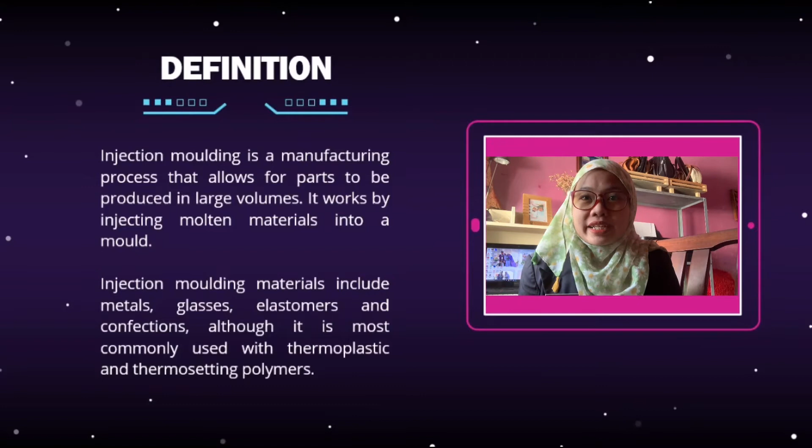Injection molding is a manufacturing process that allows some parts to be produced in large volumes. It works by injecting molten materials into a mold. Most molds are made from metal, usually aluminium or steel, and precision machined to match the features of the product.

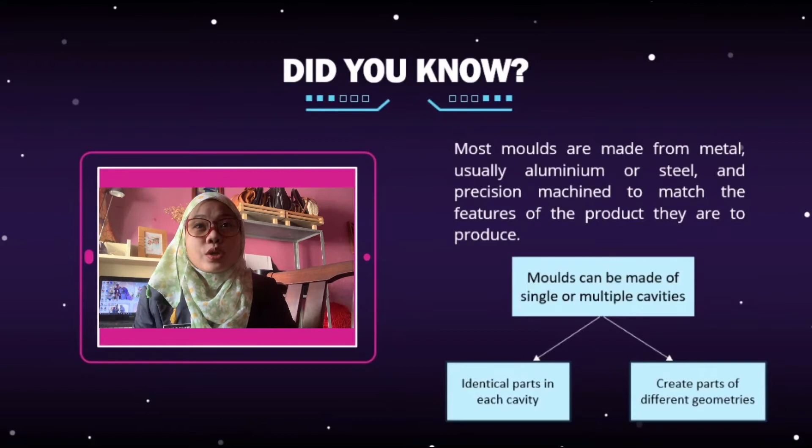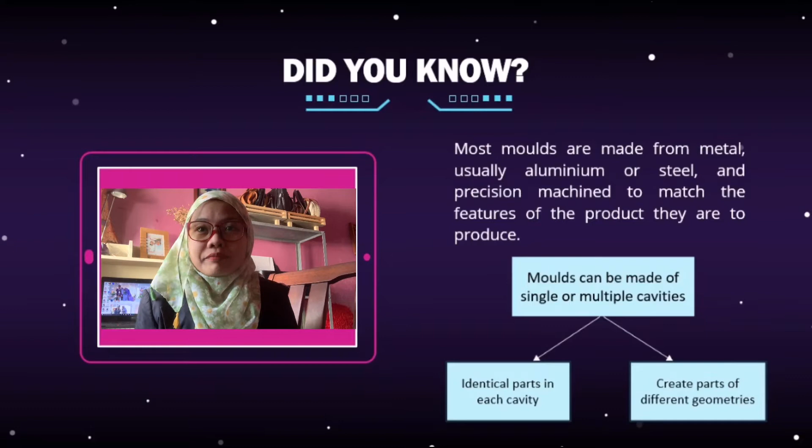Did you know molds can be made of single or multiple cavities? Multiple cavity molds can have identical parts in each cavity or can be unique to create parts of different geometries. Furthermore, the injection molding process requires careful design, including the shape and features of the part, the materials for the part and the molds, and the properties of the molding machine.

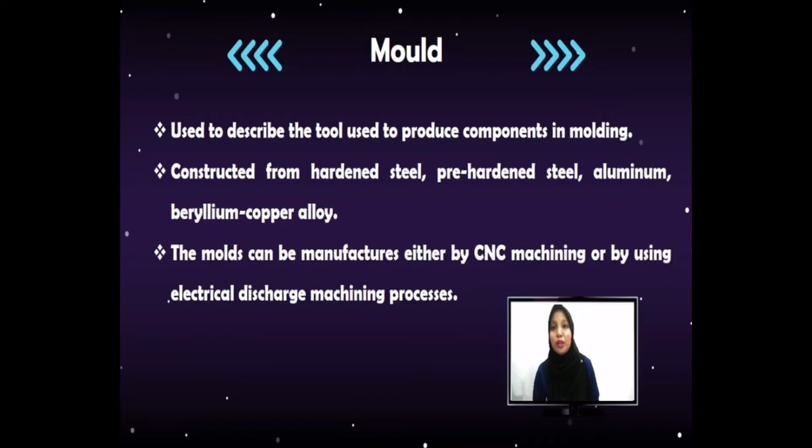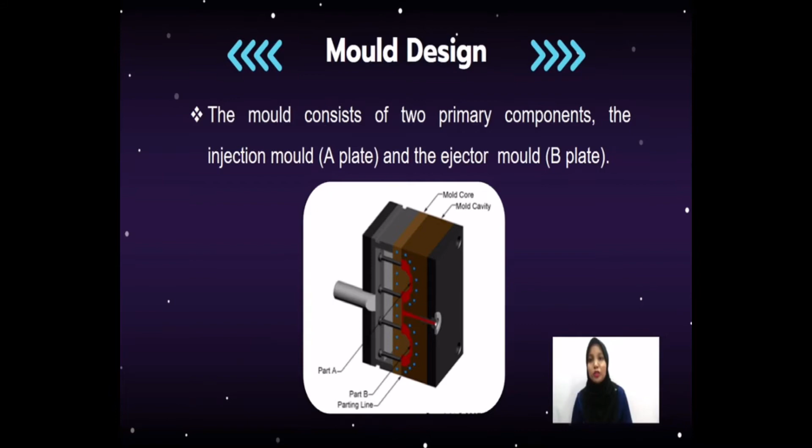Next, mold design considerations. Firstly, shrinkage allowance depends on the shrinkage property of the material, core and cavity size. Second, cooling circuit: in order to reduce the cycle time, water circulates through holes drilled in both the core and cavity plates.

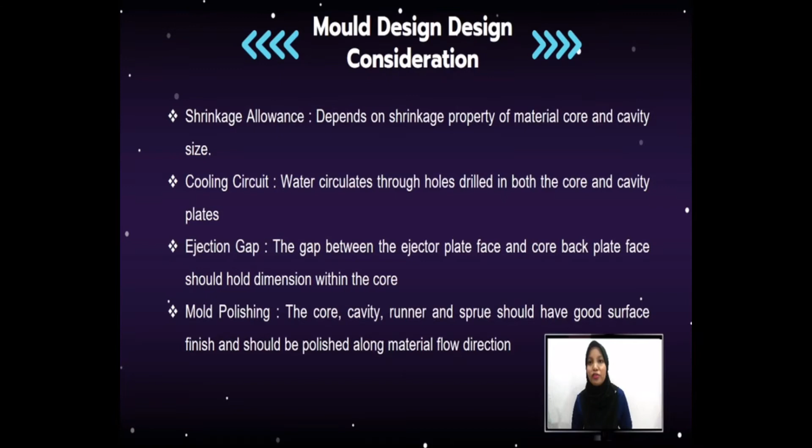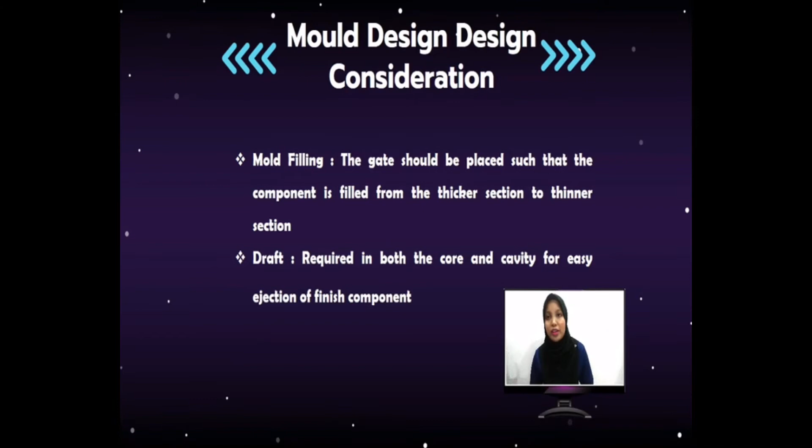Third, ejection gaps. The gap between the ejector plate face and core back plate face should hold dimension within the core, and it must allow the component to be fully removed from the mold. Next, mold polishing: the core, cavity, runner and sprue should have good surface finish and be polished along the material flow direction. Filling: the gate should be placed such that the component is filled from thicker to thinner sections. And lastly, draft, required in both the core and cavity for easy ejection of the finished component.

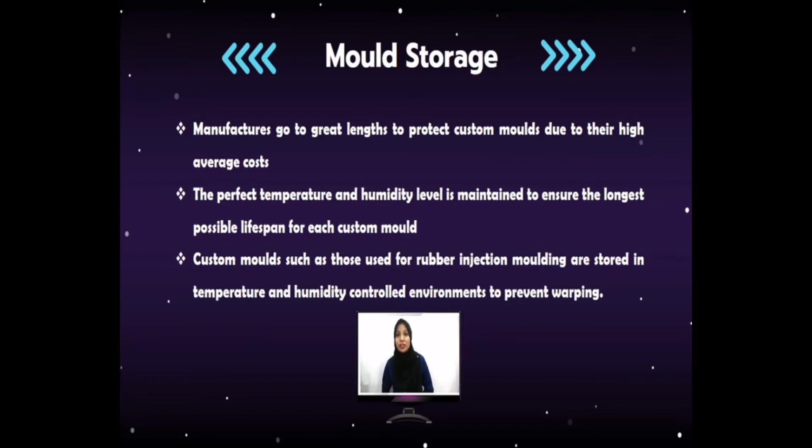Mold storage: manufacturers go to great lengths to protect custom molds due to their high average cost. Second, the perfect temperature and humidity level is maintained to ensure the longest possible lifespan for each custom mold. Third, custom molds such as those used for rubber injection molding are stored in a temperature and humidity controlled environment to prevent warping. Next, mold defects include blister, flash, burn marks, warping, weld lines, color streaks, and voids.

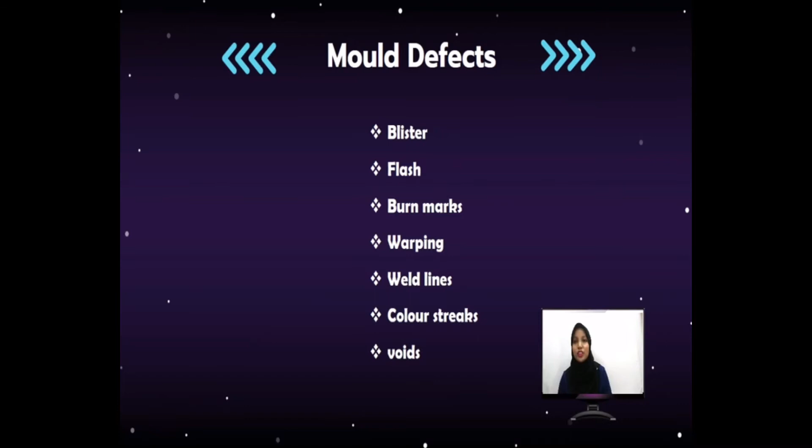Manpower: the functions of manpower are, first, to set up the process, second, to monitor the process and troubleshoot, and lastly, to operate the machine.

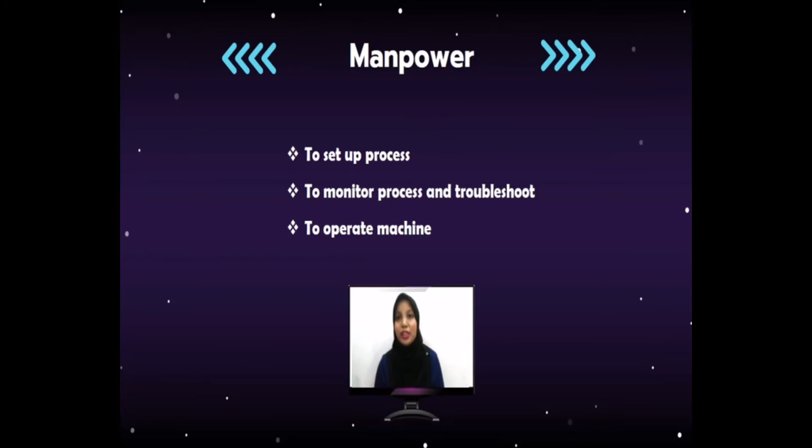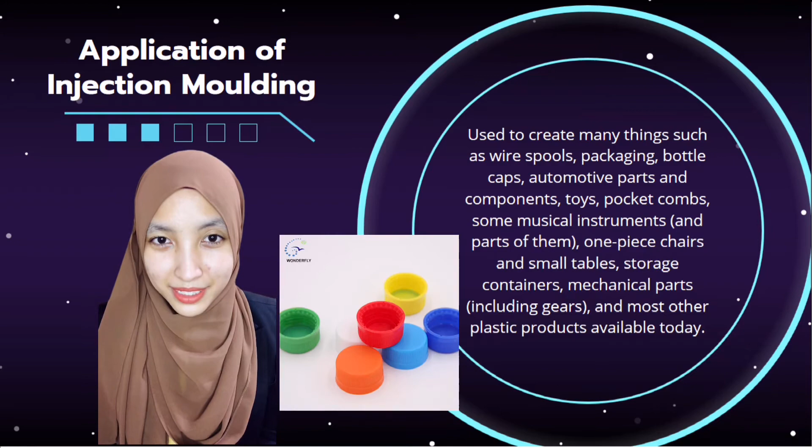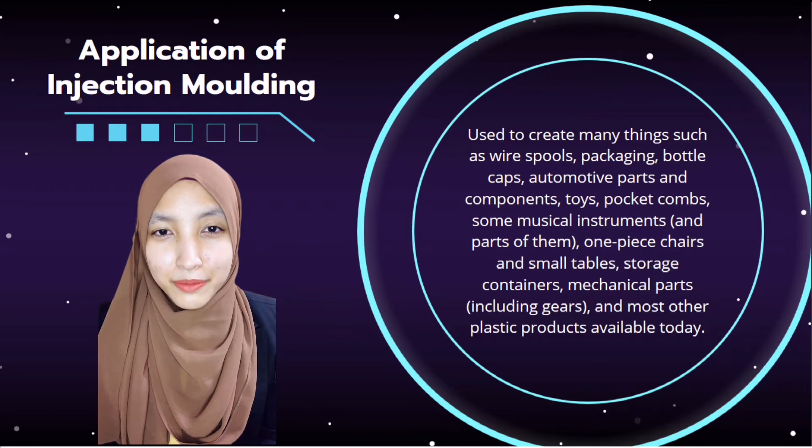Hi, today I will talk about applications of injection molding. It is used to create many things such as wire spools, packaging, bottle caps, automotive parts and components, toys, pocket combs, some musical instruments, one-piece chairs and small tables, storage containers, mechanical parts including gears, and most other plastic products available today.

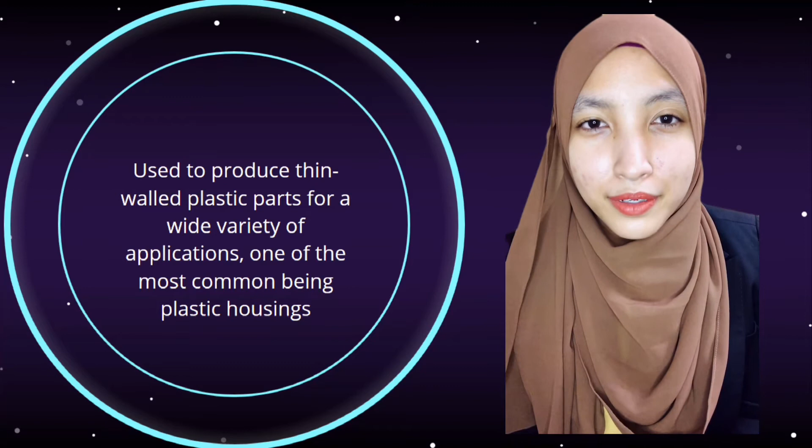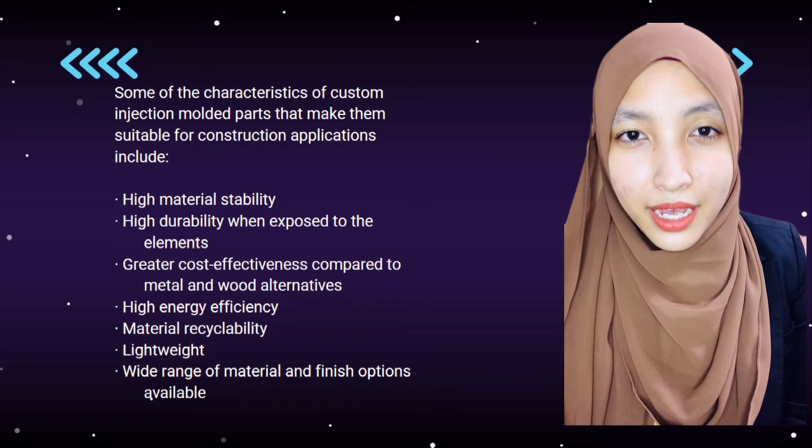It is also used to produce thin-wall plastic parts for a wide variety of applications, one of the most common being plastic housing. Some of the characteristics of custom injection molded parts that make them suitable for construction applications include: first, high material stability; second, high durability when exposed to the elements; third, greater cost effectiveness compared to metal and wood alternatives; fourth, high energy efficiency; fifth, material recyclability; sixth, lightweight; and seventh, a wide range of materials and finish options available.

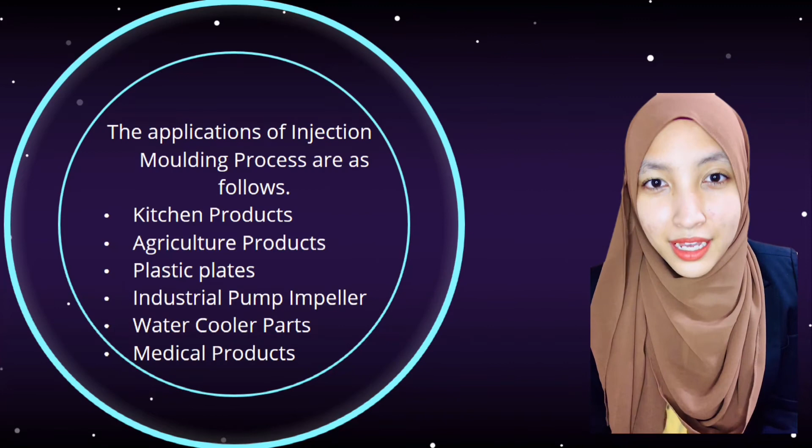The applications of the injection molding process are as follows: the first one is kitchen products, agriculture products, plastic plates, industrial pump impellers, water cooler parts, and medical products.

I'm Nora Sobeterosli and I will continue with the advantages of the injection molding process. So let's move to the first advantage: the first advantage is lower unit cost.

Injection molding often has a low production cost per unit due to reduced cycle times and a higher level of automation. Labor costs are typically relatively low in plastic injection molding compared with other types of molding. The ability to produce parts at a very high level with high output rates makes it cost efficient and effective. The molding equipment typically runs with a self-gating automatic tool to keep operation streamlined and production ongoing, requiring minimal supervision.

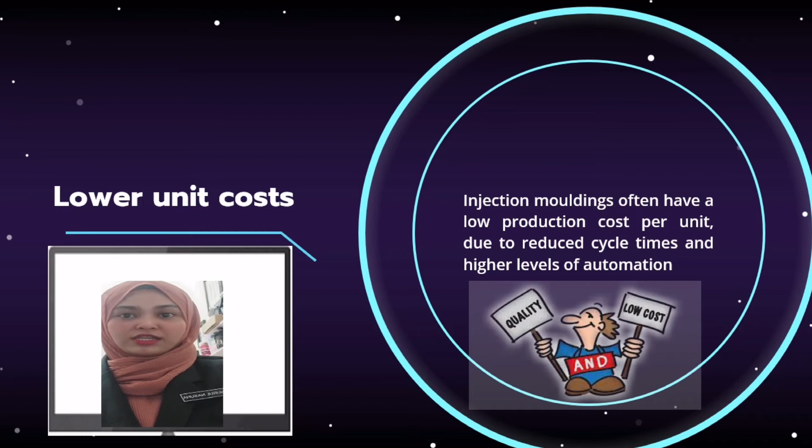The second advantage is little scrap and waste. If thermoplastic material is used in this process, excess material or scrap can be ground up and recycled so that it can be reused rather than wasted. This is not always the case with thermoset materials.

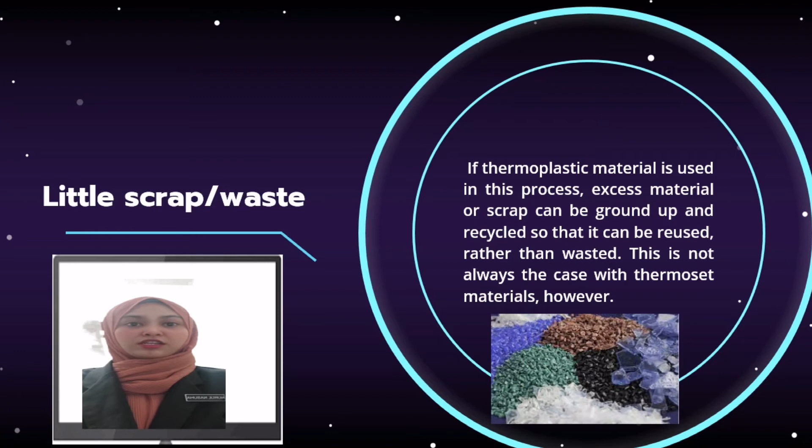However, when looking for a high-volume injection molding partner, it is important to consider a company's green manufacturing initiatives, as they signify a commitment to quality, sustainability, and optimal safety. During the molding process, excess plastic is generated, and this excess plastic can be reused again in the next product.

The third advantage of injection molding is faster cycle times. With injection molding, cycle times are approximately between 15 to 30 seconds for each cycle. This type of molding can produce a vast amount of parts per hour, depending on how many impressions are in your tools.

There are several good reasons that plastic injection molding is known as the most common and most efficient form of molding. The process itself is extremely fast compared to other methods, and the high production output rate makes it even more efficient and cost-effective.

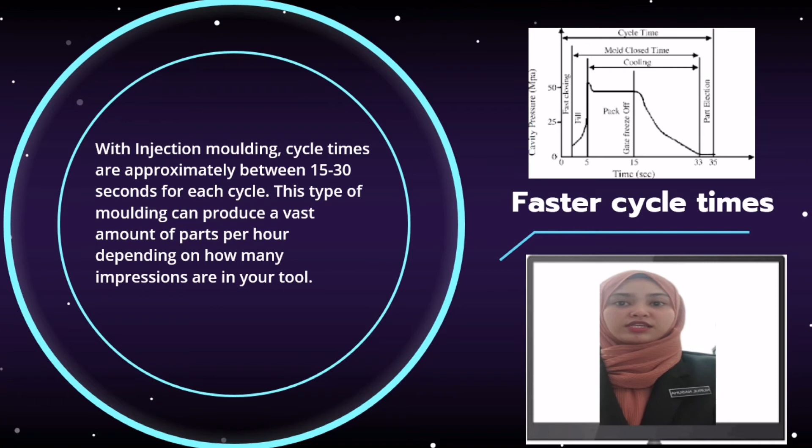Speed depends on the complexity and size of the mold, but only about 15 to 100 seconds pass between each cycle. With this short period between cycles, a greater quantity of molds can be produced in limited time, thus increasing possible revenue and profit margin.

The next advantage of injection molding is design flexibility. When you are able to design a part considering the design restrictions, you can integrate other parts of an assembly into a single plastic injection to reduce the cost and production time for this part.

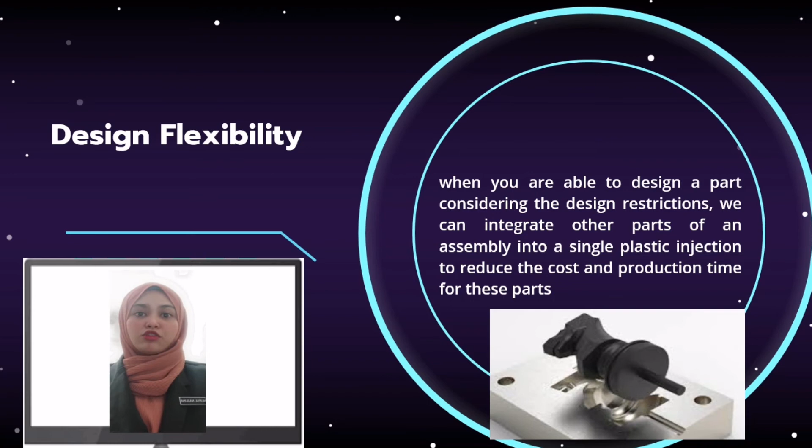Regardless of the complexity of your product, you will have complete control and flexibility when it comes to the design of your product. Additionally, injection molding allows for a range of different types of plastic and colors to be used to create your item, meaning you can customize it to obtain your desired result.

The last advantage of injection molding is consistency. In comparison to other production techniques, injection molding is second to none for its consistency. Every part produced is replicated on every turn, which is a huge advantage when it comes to mass production and ensuring quality control.

It also doesn't matter how simple or complex your design is either; if your tooling is built quality and correctly, your parts will be quality and correct. Moreover, the second part you produce is going to be practically identical to the first one. This is a wonderful characteristic when trying to achieve brand consistency and part reliability in high volume production.

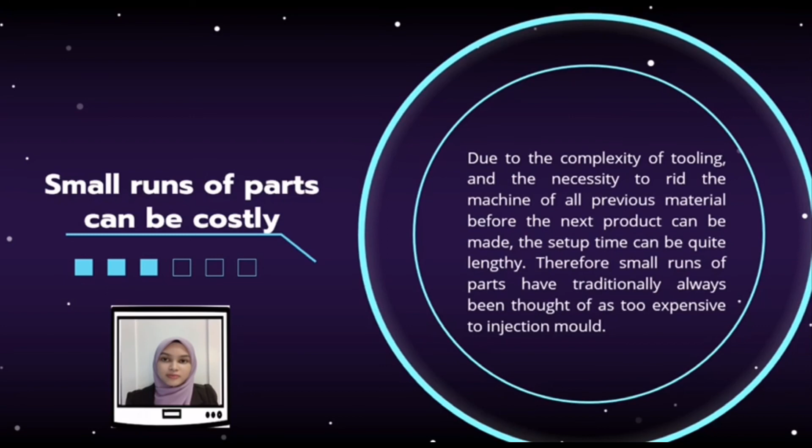In conclusion, injection molding has a great many applications for manufacturing, particularly for producing high volume parts. While the tooling and molding can be expensive, the cost of production once this is completed is low, providing the ability to produce near identical parts. Injection molding is used for parts in a variety of material types.